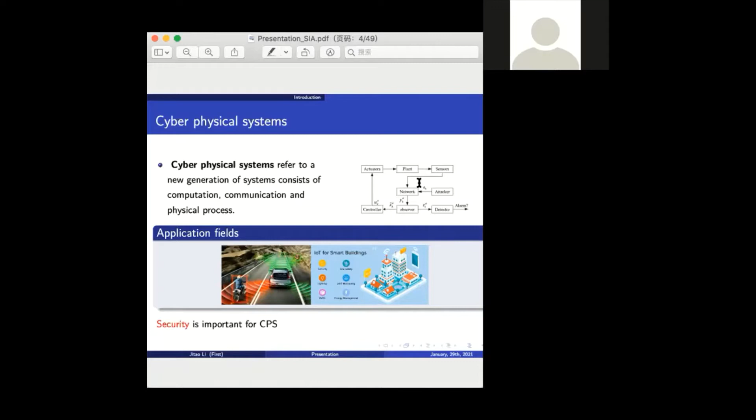Since security is very important for cyber-physical systems, one of the main issues is attack. An attack means adversary signals injected by adversaries, and the motivation behind the attack may be finance or terrorism. One of the most famous examples is called Stuxnet, which happened in 2010 on Iranian nuclear facilities.

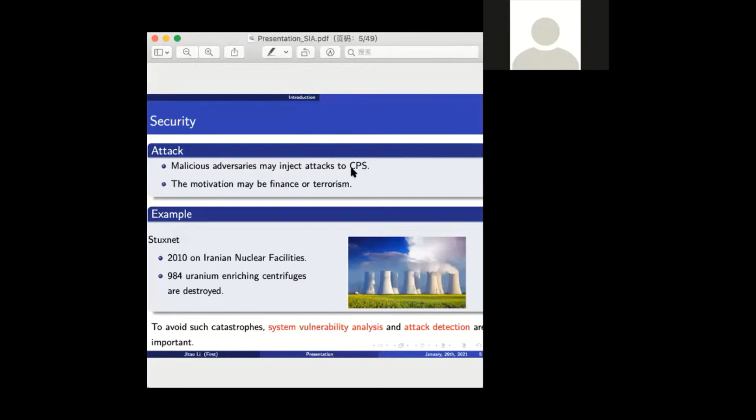In that accident, almost 1,000 Iranian enriching centrifuges were destroyed, leading to various economic losses. So to avoid such catastrophes, system vulnerability analysis and attack detection are very important, and these are also our today's topic.

System vulnerability means the system's potential for stealth attacks. There are three dimensions for analyzing vulnerability: first, is it possible for a cyber-physical system to be destroyed by potential stealth attacks? Second, how to verify the safety of the cyber-physical system against potential stealth attacks? And finally, if a CPS is not safe, how can we evaluate the degree of the threat of potential stealth attacks?

Then we are going to do some research on attack detection. Attack detection means the strategy to detect specific attacks. Generally, there are three types of attacks: denial of service attack, replay attack, and false data injection attack. In this talk, we are focused on replay and false data injection attack.

The tool we use is the zonotope. Zonotope is one of the methods of reachability analysis, computing a set which includes all possible state values based on available information. These sets can be divided according to their geometrical representation, mainly into three kinds: polytope, zonotope, and ellipsoid.

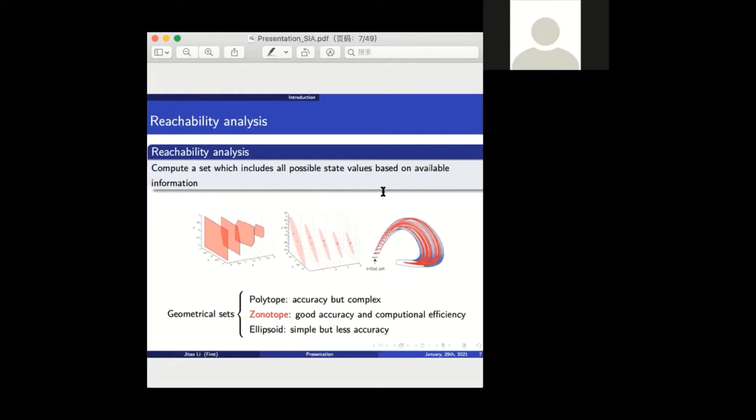Let's go to the second part, some preliminaries. Since we adopt the zonotope as the set representation, I'll briefly introduce the definition of zonotope and some of its properties. First, a zonotope can be defined using this equation.

We can see that it consists of three items: C, B, and H. Here C determines the center and H determines the shape, and B denotes a vector among a hypercube.

The geometrical interpretation of this equation is the Minkowski sum of M segments, line segments, and its center, as we can see from the above three figures. The first one, if M is 1, it can represent a segment of a line. If the dimension is 2, that is M is 2, this zonotope can represent a parallelotope.

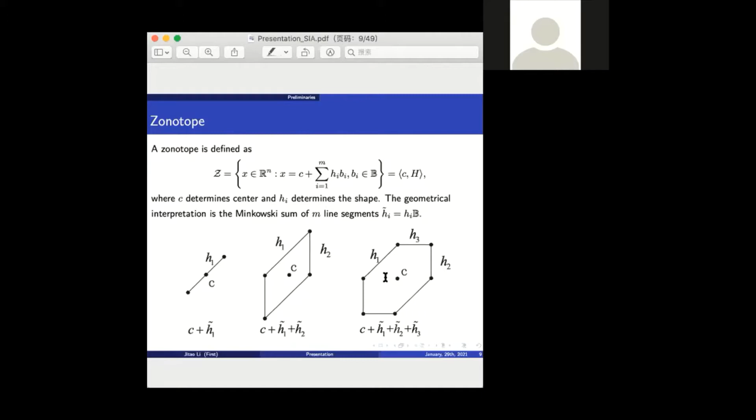Since we consider zonotopes, they have some useful properties. The first property is called Minkowski sum, that is, the Minkowski sum of two zonotopes is still a zonotope. As we can see from the above figures, the first zonotope plus the second zonotope, their Minkowski sum is plotted as this form. So we can see that it can still be represented as a zonotope.

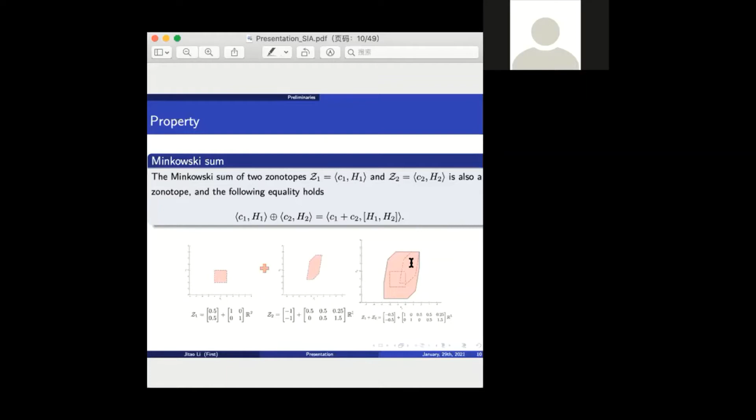The next property is called linear transformation. That means given a zonotope, its linear transformation associated with a matrix is still a zonotope, as we can see from the above figures. This zonotope, by multiplying with matrix K, it still can be represented as a zonotope.

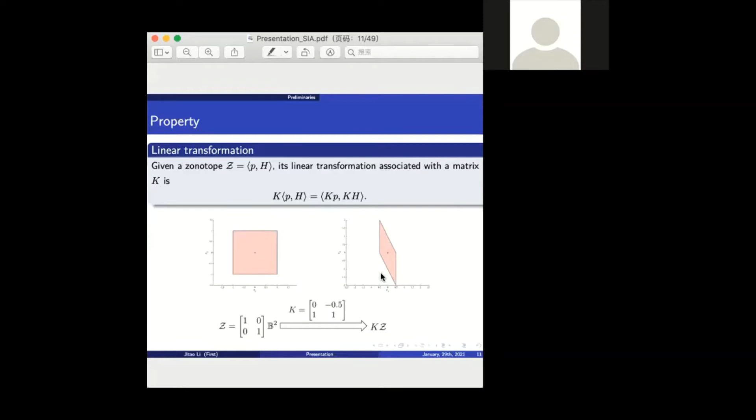Here we consider a cyber-physical system. Please keep in mind that this system consists of two parts: the state dynamic system of the physical plant, and the remote estimator and controller. As we can see from the right figure, the above is the physical plant, and the lower controller, observer, and detector are remote computation parts.

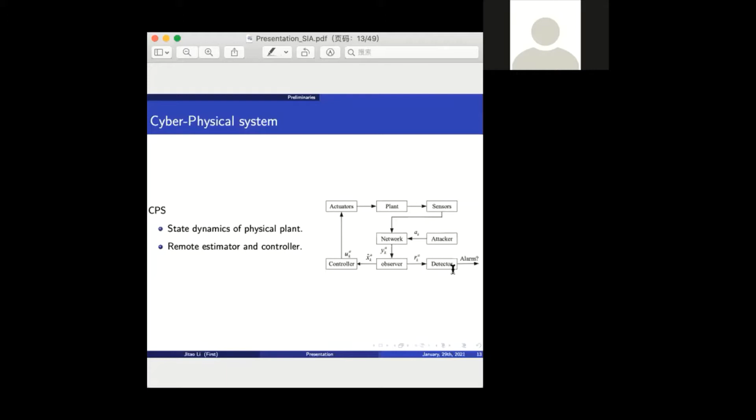By keeping this preliminary in mind, we can go to today's topic, that is vulnerability analysis.

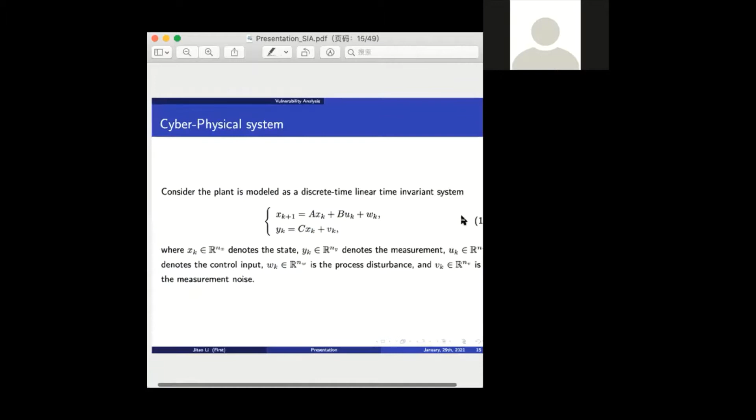Let's consider our cyber-physical system as equation 1. As we can see, it is a discrete time linear time invariant system. For this system, we have 3 assumptions. The first assumption is that AC is detectable and AB is stabilizable.

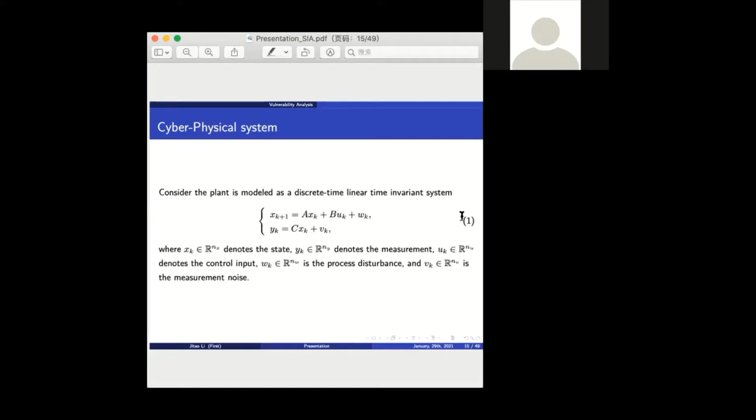That means for this plant we can remotely equip our observer and our controller. The second assumption is that the disturbance, environment noise and the initial state are unknown, but they are peak bounded by a zonotope. And assumption 3 is that

this CPS is equipped with a Luenberger-like estimator and a linear feedback controller. We also assume that any choice of L and K, such that A minus LCA and A plus BK are stable, is acceptable.

For this cyber-physical system, it is equipped with a detector, which is also represented by a zonotopic set. As we can see, if we define the estimation error in this form, then its residual signal satisfies this dynamic system.

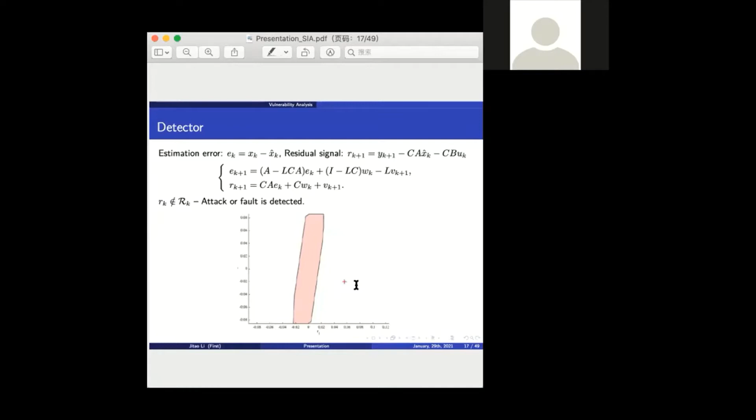To capture the attack's impact on the system, we can rewrite system 1 as equation 2. Here we can see that the difference with equation 1 is that in the measurement equation there is an additional item, that is FAK. Please note that here F is the attack sensor selection matrix, but it is unknown to the system designer.

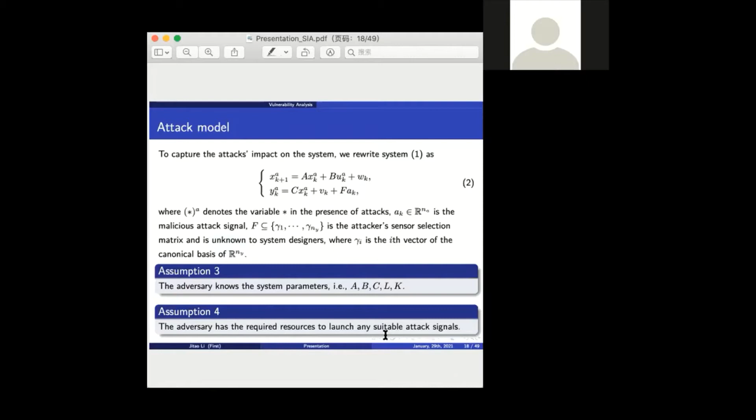We also assume that the adversary knows the system parameters and has the required resources to launch any suitable attack signals. So by combining equation 1 and equation 2, we can go to the problem formulation.

Before going ahead, we are going to define a safe range, which is also represented by a zonotopic form, that is set X. For this set, it can represent, for example, the constraint of the acceleration and the velocity of our vehicle.

The stealthy attacks, here we consider the vulnerability for stealthy attack. The definition of stealthy attack is that it is defined as an attack sequence that does not trigger the alarm.

Note that the vulnerability analysis is divided into 3 parts: is it possible for the CPS to be destroyed, how to verify the safety of our CPS, and if our CPS is not safe, how to evaluate the degree of the threat of potential stealthy attacks.

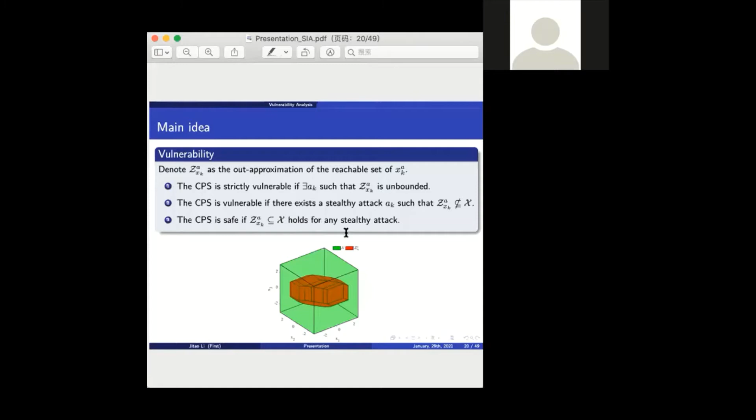First, for the strict vulnerable, it means that there exists a stealth attack AK such that the set is unbounded.

And for calculating this set, we should use this dynamic, which associates the attack signal AK and the difference between the residual signal, delta RK.

For this dynamic system, by using this system, we can get the conditions for strict vulnerability. That is, this set is unbounded if and only if there exists an eigenvalue, an eigenvector epsilon, corresponding to the unstable mode of matrix A, satisfying some rank conditions.

This condition is motivated by this paper, published by Professor Mo Yilin in 2010. If the readers are interested, I refer you to read this reference.

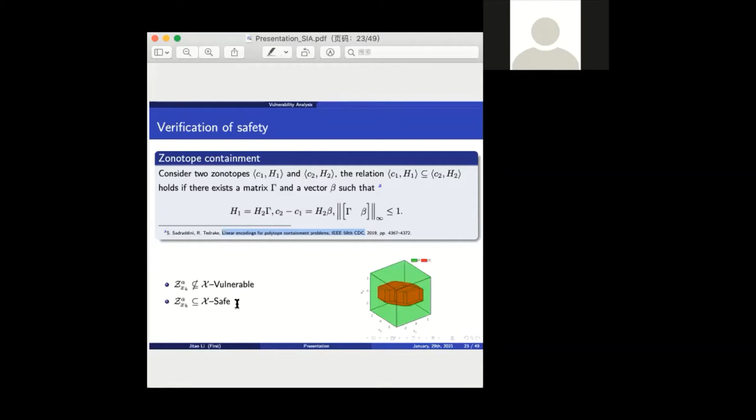Okay. If the CPS is vulnerable, we also need a metric to measure the degree of vulnerabilities. Here we use the one-sided Hausdorff distance, and this is its definition.

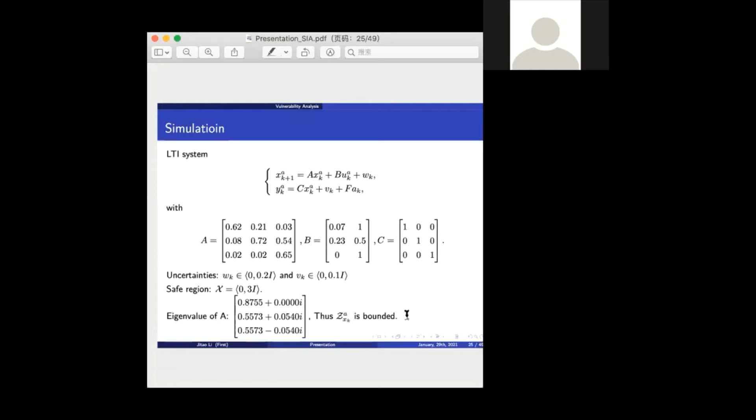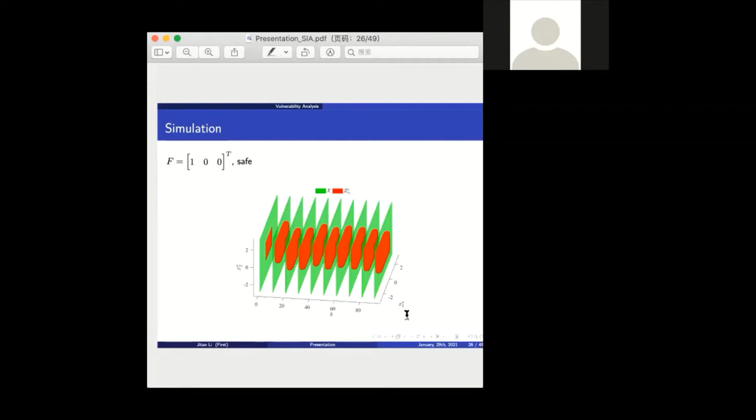And here we also calculated the case that other sensors are attacked. Since we have 3 dimensions for the measurement, here we have 7 cases.

And there are degrees of vulnerabilities, that is, the one-sided Hausdorff distance is also calculated. We can see that for the case where 2 sensors are attacked, for the first and the second sensor attacked, the vulnerability is 3.

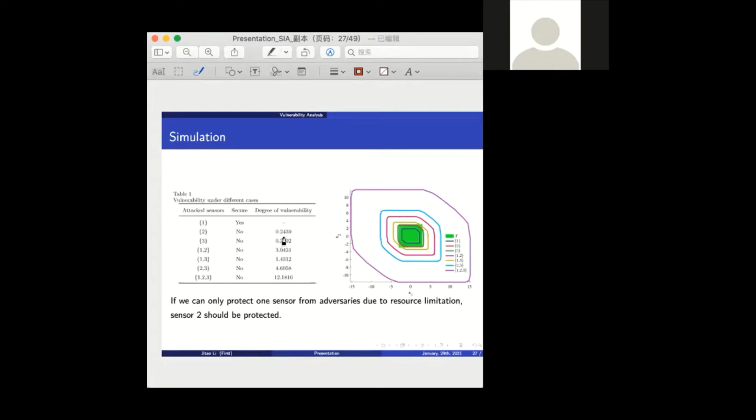Okay. Go ahead, you go ahead. Okay, then...

The next part is to do the attack detection for the CPS system by using zonotope.

Here we also consider a linear time invariant system, and we also consider that the attack indicates the injected bias on the sensor data. We also made the assumption that the system is detectable and stabilizable, and the uncertainty and the initial state are unknown, but peak bounded by known zonotopes.

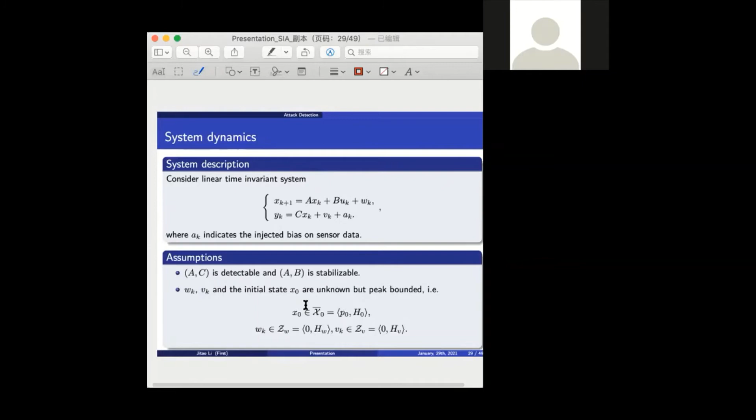Here we are going to use two sets: the predicted state set and the measurement state set. The predicted state set is obtained by using the system dynamics equation, and the measurement state set is obtained by using the measurement equation. This is their definition.

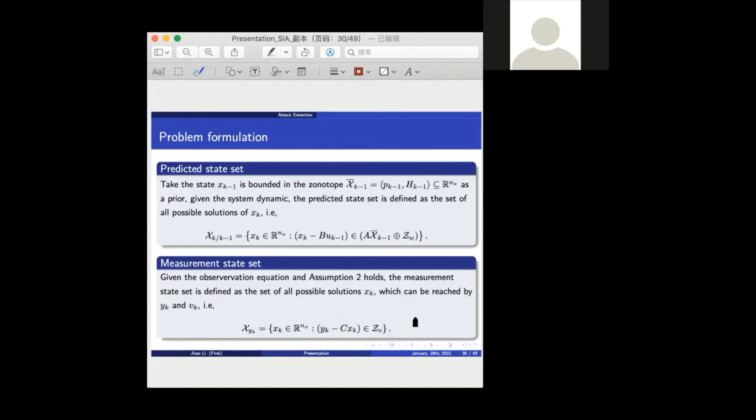By using these two sets, our objective is to check if there is an intersection between them. As we can see from this figure, for the first part, the left figure, there is intersection between these two sets. So this case is the attack-free case.

And for the attacked case, the set X Y K will deviate, and finally it may reach a point where there is no intersection between these two sets. So by using this mode, we can do attack detection.

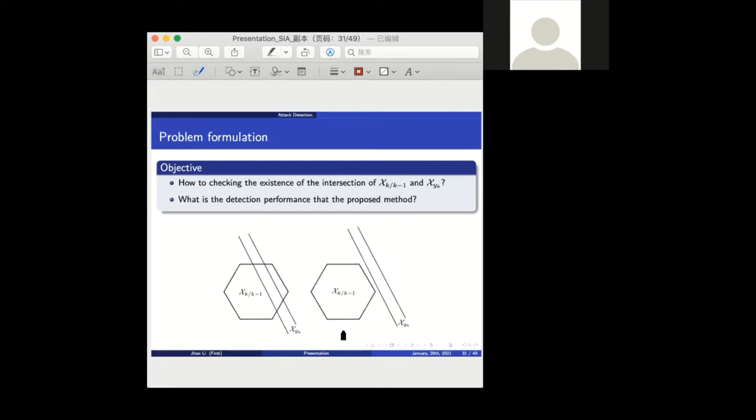Before going on, we need to calculate these two sets. Please note that when there is no attack, this set can be calculated by using a parameterized XK bar, which can include the intersection between the predicted set and the measurement set, as we can see from this figure.

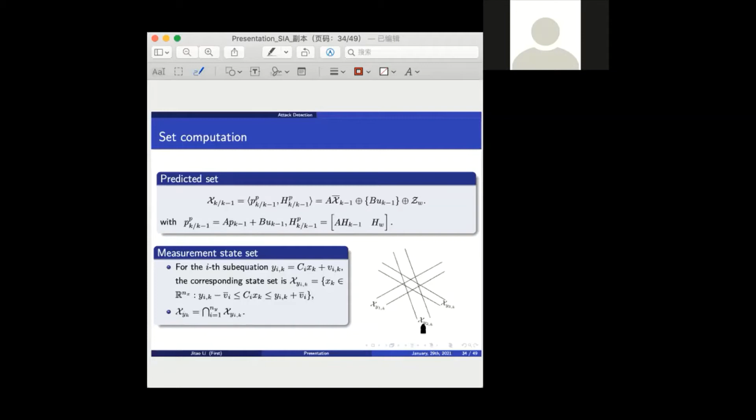Then we are going to check the intersection between these two sets. Here we are considering two methods. The first method is called the projection method.

But this method has some disadvantages, as we can see. We'll use an example to illustrate it.

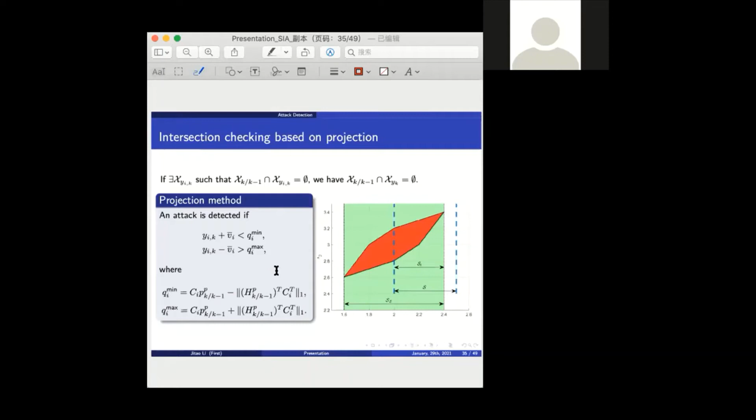But if we use the projection method, we can't get this conclusion. So the projection method fails.

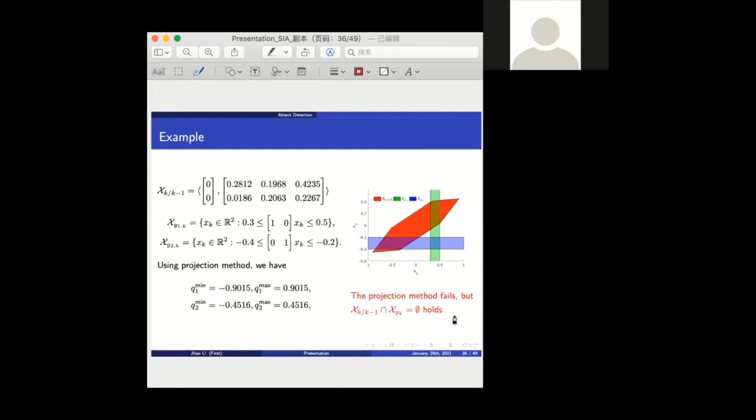But this disadvantage is overcome by using another method, that is the polytopic conversion. With the polytopic conversion, we can convert this zonotope into a polytopic representation.

As we know, the intersection of the polytope can be represented accurately in this form. So by checking if this set exists, we can know there is an intersection between the predicted set Xk,k-1 and XYk.

Here we make a simple conclusion. For the projection method, it is very simple, but the performance may be less satisfactory. And for the polytopic conversion, the performance is satisfactory, but it may lead to heavy computation, because it will use the polytopic set representation.

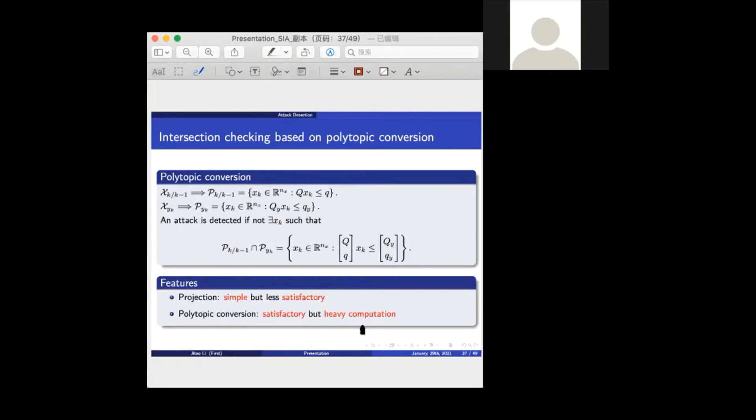For these two methods, we also analyze their performance using a definition called the stealthy attack set. It is defined that for a given detection method, any attack outside set AK will be detected - this set is called the stealthy attack set. Here we calculated the stealthy attack set for the projection method and also for the polytopic conversion method, and this is the calculation.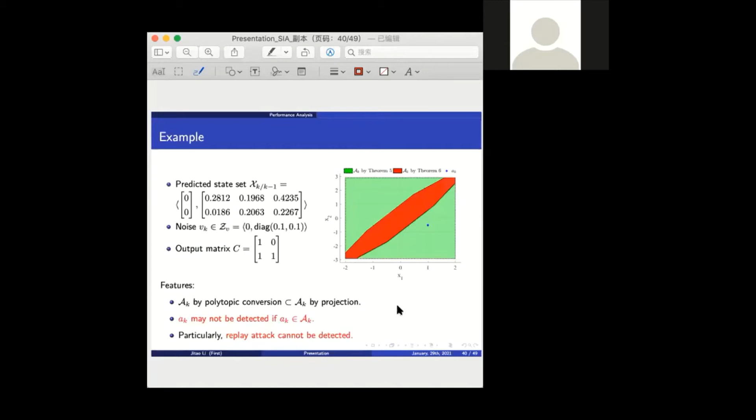So to detect a replay attack, we consider injecting a noise signal, and this is motivated by the method called watermarking. The difference is that here the injected signal is generated with a uniform distribution.

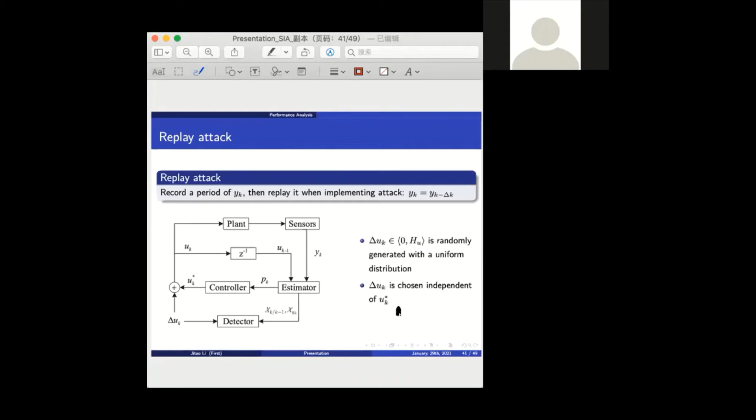A question arising intuitively is how to calculate the signal we injected. To calculate this signal, we are going to define. We should consider...

Then a suitable signal can be obtained by solving this optimization problem, where delta denotes the tolerable control performance loss.

The left figure denotes the stealthy attack set calculated by two methods: the projection and the polytopic conversion. As we can see, the red one is enclosed by the green one, so the polytopic conversion can achieve better performance than the projection method.

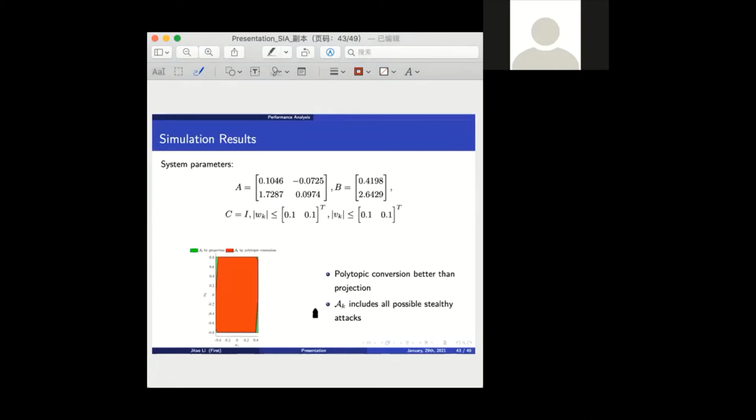Please note that here AK includes all possible stealthy attacks. So if we inject a signal that is 0.3 and 0.5, we can detect it. As we can see from the figure, it is detected at time instant 100.

The computational time is also depicted in this table. We can see that the time by using the projection is much lower than the time used by using the polytopic conversion.

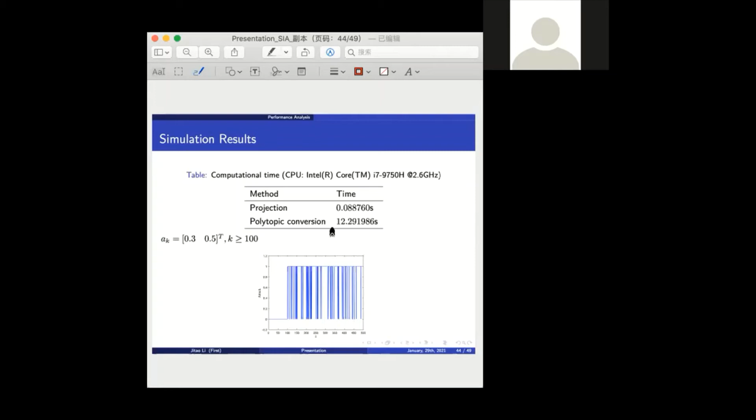So we can see it is effective. Next figure: we also simulate the case that the recorded sensor data is replayed at different time instants. As we can see from this figure, all of them are effectively detected.

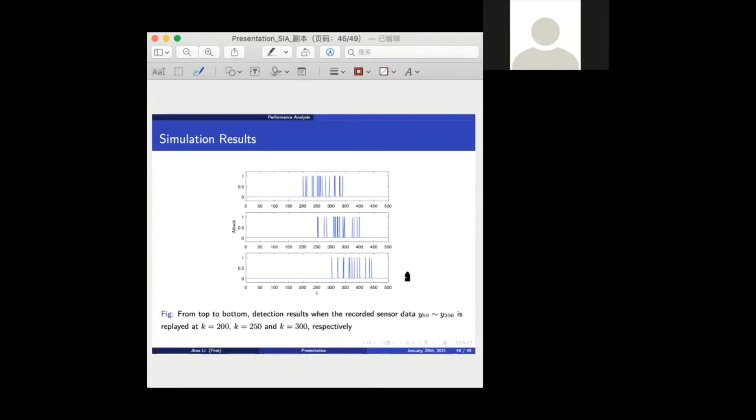Finally, let's go to our conclusion. First, our zonotopic system vulnerability analysis and attack detection framework based on zonotopic reachability analysis is established. The capability of stealthy attacks is analyzed, which may be helpful for establishing defense strategy. The detection of false data injection attack and replay attack are considered. That's all, thank you.

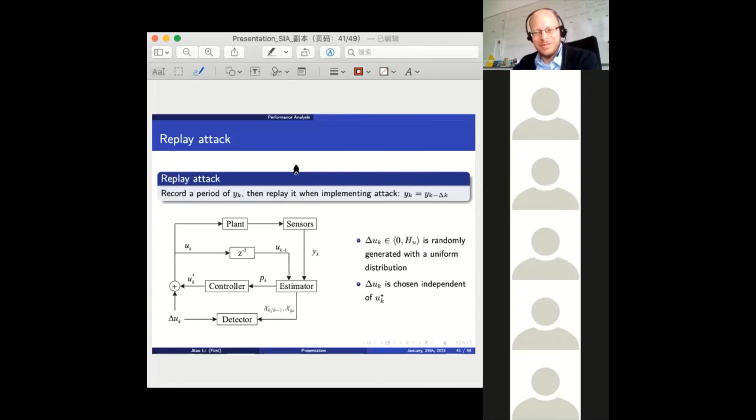Okay, thank you, congratulations for this very nice work. May I ask a question? Yes, please. First, thank you for giving us a very interesting topic. I have two questions to discuss. May you go to page 13? Page 13. No, 13, not 30. Sorry, 13. Okay, yeah, that's right.

From this figure, I know that for CPS we have two channels, the feedback channel and the forward channel, and you only consider the attack on one channel. So is it worth considering the two channels to be attacked? My question is, why do you consider only the attack on the sensor, not on the actuator? Can you please address that? Okay, first, that's my question.

First, thanks for your question. Because if there is an attack signal which is injected on the control signal, this signal will bias the measurement signal, is it right? And finally, to the remote controller, it will have the same effect.

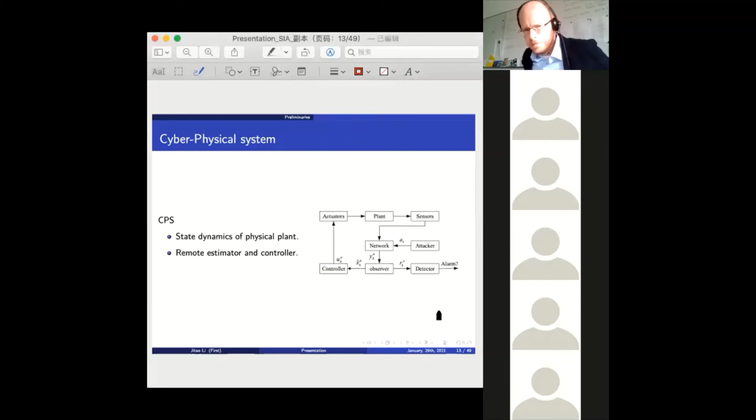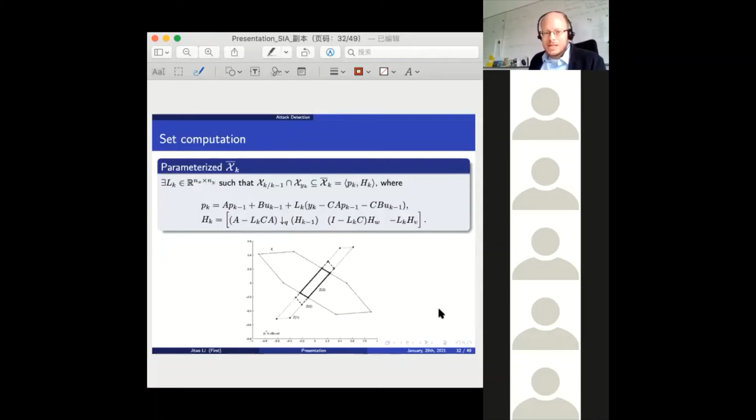During your explanation of this slide, you said you want to reduce the complexity of the description of the resulting intersection set. I was wondering, with which techniques do you reduce the complexity? Maybe it would make sense in this case to use some techniques, for example, from principal component analysis, in order to reduce the complexity of this matrix H.

For reducing complexity, this page means that if there is no attack, then there must exist an intersection between the set x(k|k-1) and the measurement set XYK. So during the propagation, how can we compute an outer approximation of this intersection?

And here, yes, exactly this is my question. How do you end up with an outer approximation that is, let's say, as simple as possible in its description?

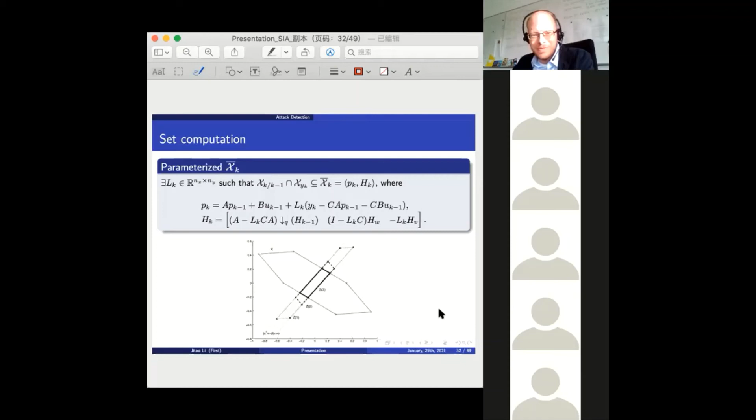Okay, the answer is on the next page. We define our size criterion, that is the size of the segment of the zonotope, and then by minimizing this size criterion, we can calculate the L matrix.

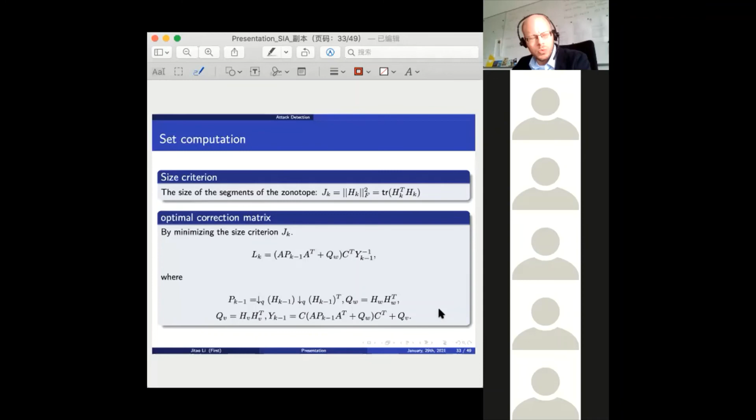Sorry, can I add a second question? When we go to slide 36, in your projection technique, it's quite easy to see graphically that the problem is you're always intersecting, for example, the red area with the green one, the red area with the blue one, but not the green with the blue one. So the question is, would it make sense to check the measurements first and then do the projection?

And the other question is, I think detecting this scenario as something where you have the attack would be quite easy using techniques, for example, for feasibility analysis of linear matrix inequalities.

For your first question, do you mean yes, first intersect green with blue? Perform a rotation of the red area so that it becomes more or less parallel to a new coordinate frame, in the direction of the principal axis of this red area. Then you immediately see that a projection of the intersection is outside. I think that's more or less just reversing the order of your intersection operations, something to consider for future work.

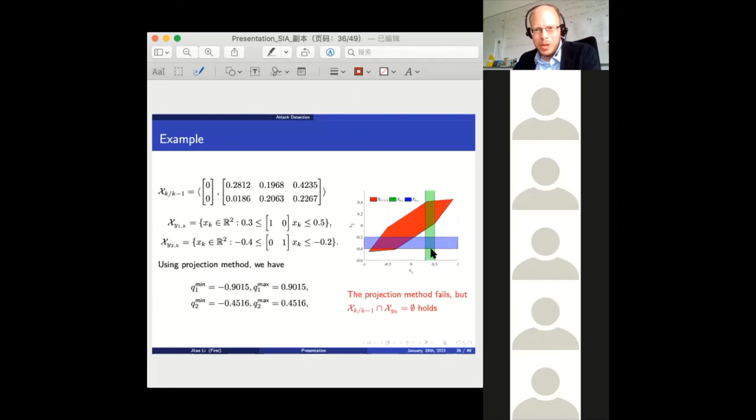This formula in the curly brackets, that's an LMI. No, it's not an LMI. It is an LMI in X.

I think that during this inequality, it's linear programming, without yes, linear programming. Simple linear programming. Yes, it's simple linear programming, and using tools for linear matrix inequalities, you can show that this is infeasible. I'm almost sure that this works immediately.

Okay, yes, further questions? Okay, actually.

Thank you for pointing out this problem. Yes, this is my typo. Have you checked the Zonotopic Kalman filter? Because actually many of the concepts you are using are related to this.

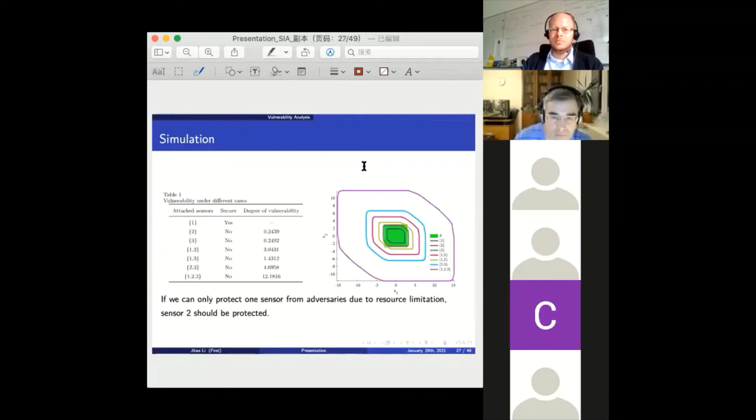Yeah, just, yeah, you are right. If assumption 1 is satisfied, then assumption 3 is it also—it also can be achievable.

Yes, one last thing. The value of L, Combastel used something called the Frobenius radius, and he optimized using the Frobenius radius. So maybe this can give you a better performance. Since you already found the optimal for this case, maybe you should take a look. But I think it's a really, really nice presentation. Thanks. Thank you.

Here, I would like to point out that I made assumption 3 only to show that the matrices L and K are predefined, and they will not influence the definition of vulnerability—that's my purpose.

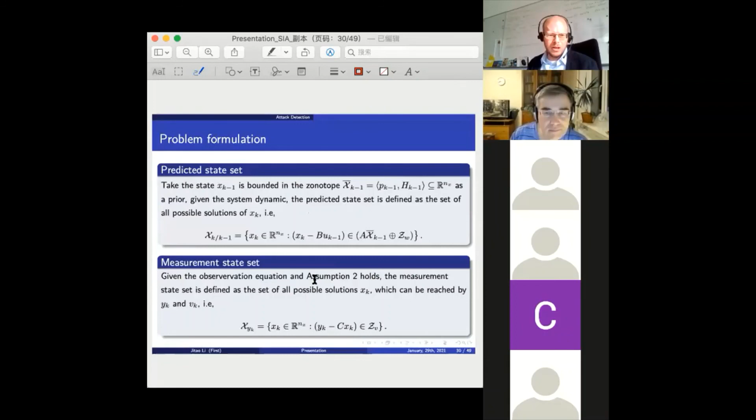Okay, before we come to the end of today's seminar, another question came to mind. You mentioned, I don't know which slide this was, around slide 30, something concerning the controllability of attacks—you had some controllability matrix that showed that you can excite the system.

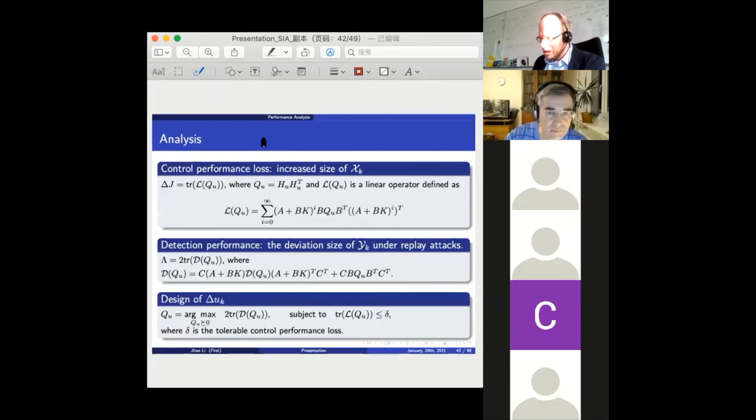You can certainly evaluate this controllability matrix and check whether it is controllable or not. But classically, for example using Kalman's criterion, you don't get anything concerning a degree of controllability. Would it make sense, for example, to compute the controllability Gramian here in order to figure out how strong or weak the vulnerability is, because this gives more or less an absolute value on the degree of vulnerability?

Note that this condition is made for strict vulnerability. It means that we can inject a signal a_k such that the item delta e_k goes into infinity. So yes, it's a structural result—it just says is it vulnerable or not, achieve yes or no. It's just black and white. But you don't get anything concerning the degree of vulnerability.

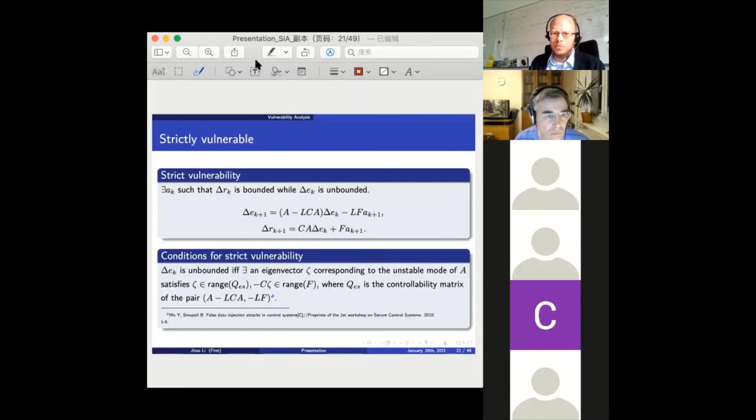Are you close to the border of vulnerability or not? And I think this closeness to the border between vulnerable or not could be checked by using the Gramian. It's just a classical result of controllability analysis.